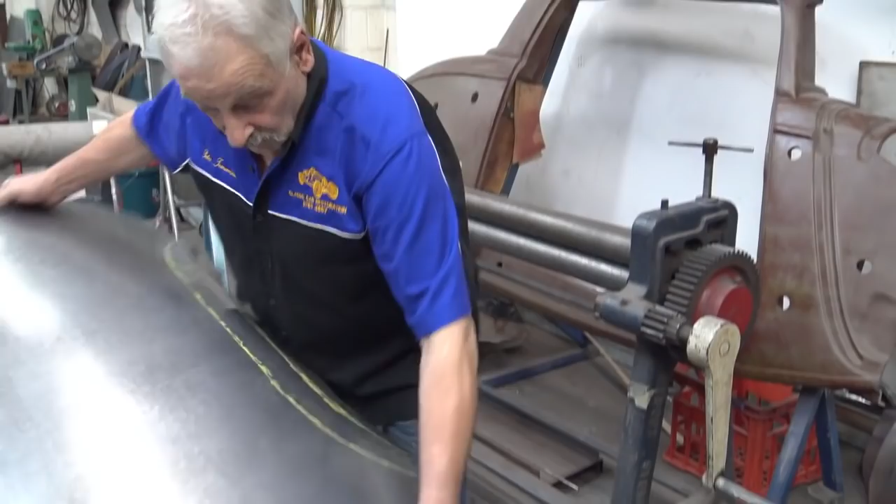All right. Front of a Jag bonnet. I'll show you the mess of the bonnet that I'm working on. Just follow me. Now, that one there. Here we go. This is the bonnet in question. I get the cameraman to go close and have a look at the mess. It's a real mess. It's just too high, too thin.

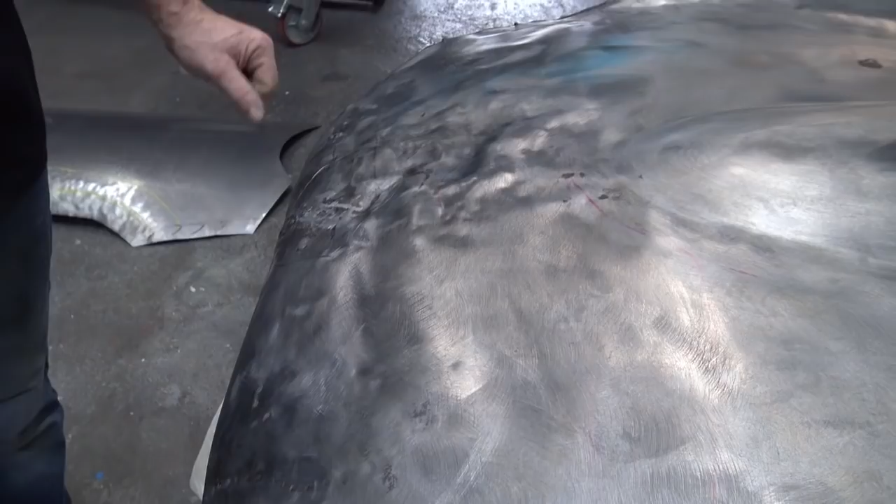They sand the metal out, it's full of holes. It's got damage here, damage right through here. And as you can see, it's fairly high through here from being punched in. But we'll fix all that and then we put the new front.

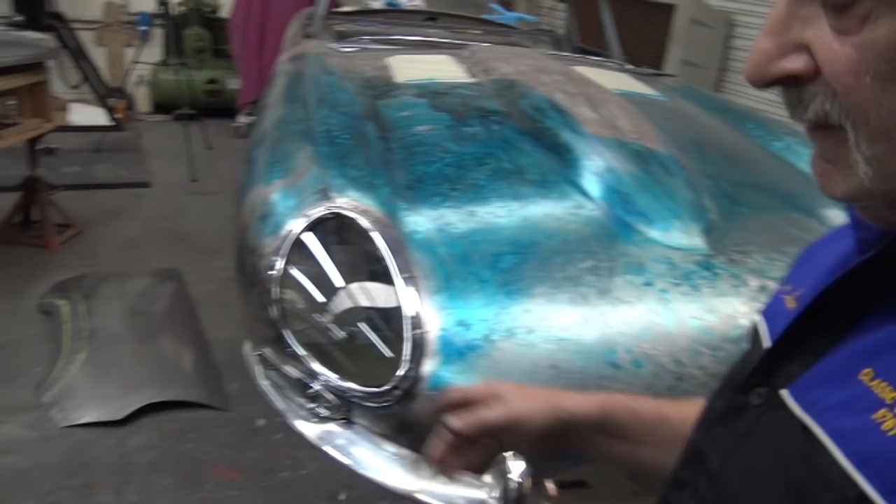Now, the reason why I'm showing this is because I haven't got any bonnets to take patterns off, but I thought I'd use this bonnet, which is the one off the Jag that we're finishing off now. So this is the bonnet that we're taking the patterns off, and that's the reason why I started today, because next week this will be gone. So what you can see there is just the start, the very start.

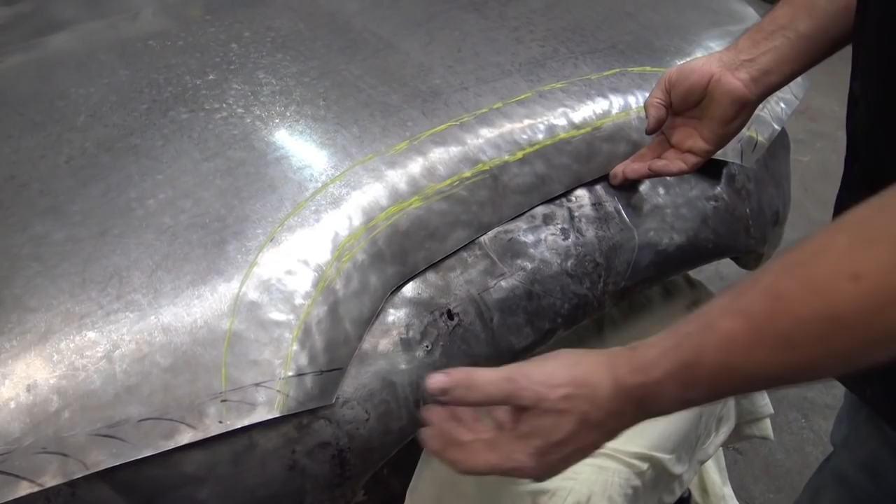And I'll explain to you what I did here. I've marked the edge that goes under, and it's a little bit like the Ferrari panel really. And I marked where most of the shape is for the mouth and blend it in. But as I said before, it's a long way to go yet. But you can see that with a little bit of persuasion, I'm gonna get there somehow.

So that's what I've been working on today, and that's the reason why I'll probably keep the Healey guard a little bit shorter than usual. Okay, back on the guard now, and today I'm going to explain a few things on this panel. I'm gonna take the back half off, and then we're going to work on this. So let's start doing something.

I'll put this away. Let me explain a couple of very important things when you're doing a return like this, because you can get into trouble. The first thing you must do when you've got the pattern is decide a width here. See this line here? This coincides with the guard underneath, and I'll just lift it and show you. That line there is this edge here. So we need to have that somewhere near it, okay? Within a couple of mils, but as you can see, I've got plenty of metal.

Well, that will stop the panel doing either this or that, which then, in turn, will affect this. So you can see that if I move it out of where it should be, it tells you that there's something wrong, but it's not. It's just the way that you put it on the car.

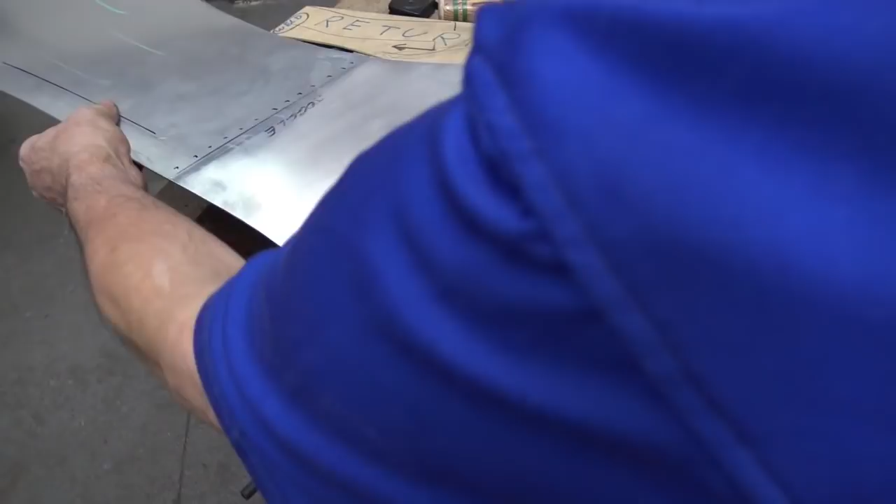So a couple of traps. The first one, make sure you've got enough metal and you can put it in the same spot by literally putting your fingers like that. Second one, make the return and get it somewhere near it. In other words, don't have the return there or have the return there, because as you can see, it doesn't work. So have it somewhere near it. It can always be adjusted because of the length of the guard that you're making.

And thirdly, make sure that this area here, this bulbous shape, is deep enough so that it allows the return down. I hope I'm clear on that. But as you can see, I get the cameraman to come down and have a look. I've got it where it should be as far as the length goes. Keep in mind that the weld is back here. I'm sorry, yeah, back here. And I've got two little lines there, right there.

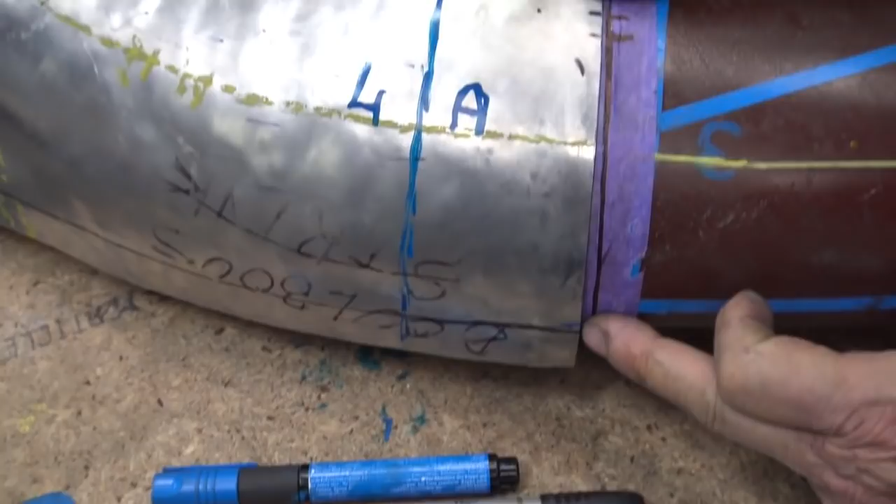Now, at this point, if I put a clamp on that, see there's another line there, and there's another one down here. So at this point, you should be somewhere close to the return here, and by the same token, somewhere right there.

That's how you work on it. So now, I need to do a little bit more blocking in here, just a little bit, because I can see that that's not round enough, and that possibly will stop me from coming down. So what I'm going to do, I'm going to smooth that off a little bit on the block with the blocking hammer right there. Then I'm going to literally open it and start wheeling it.

But as you can see here, there's not that much to do. You can't twist it, you can't do anything real bad, because the guard, as the last guard, sits there pretty good. So obviously, yes, there's a bit of adjustment to do, but we're 95% there. Okay, so now I'm going to show you what I do here, and then I'm going to open it and I'm going to smooth it off.

So now we're going to smooth this part up right there, but the best bet is to open it a little bit, because otherwise it will just keep closing, and that's not what you want. So what I'm going to do, I'm going to open it a touch, just exactly like I did the other one. See, I'm going to open it, and of course when I block it there again, it's going to close. So here we go.

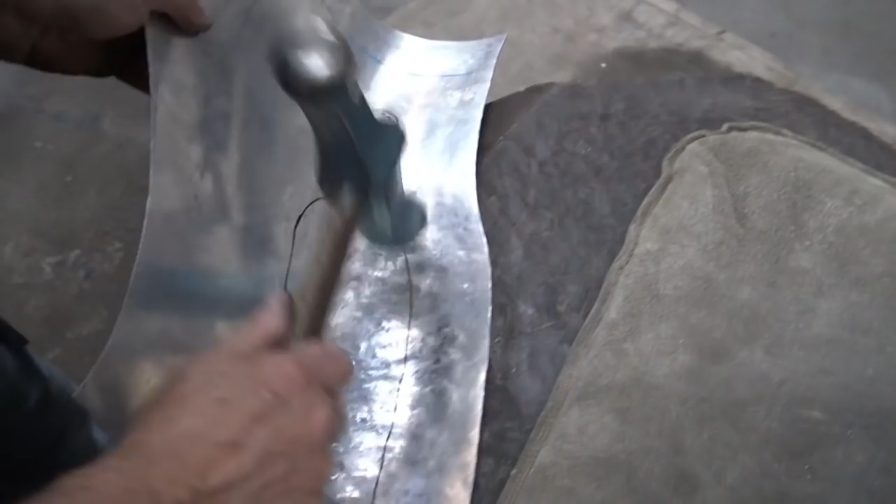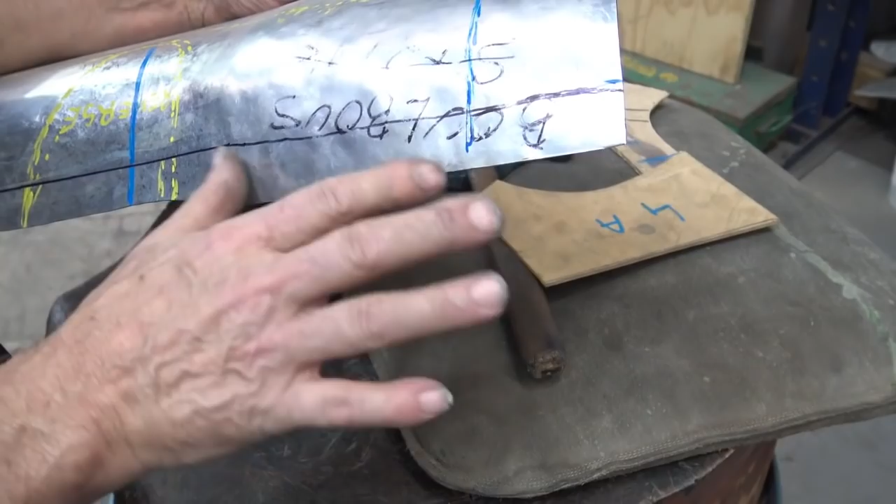Okay, now I'm going to put my gauge on and have a look at it. Okay, I've got my gauge here, 4A, and the same thing applies as like the rear of the guard. I've got a given line here, which I forgot to mention, by the way. I put a line there. It will go deeper, which means that the line possibly comes to here. But for the time being, all we want to do is to see where we're going before we're wheeling. So I'm going to put that there.

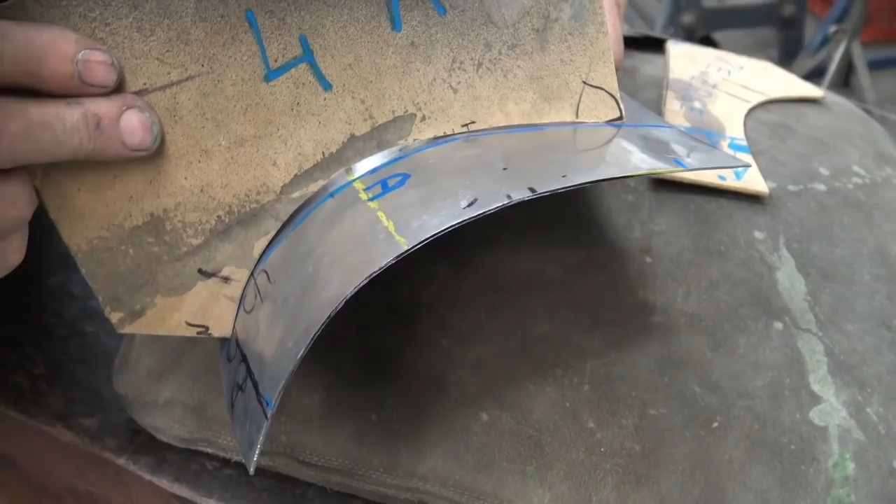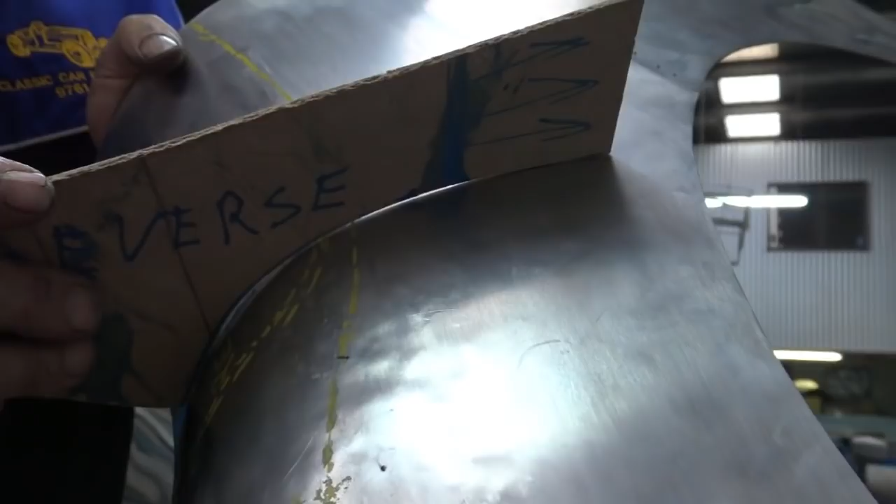Okay, going by this, as you can see, it needs more blocking here. I'll show you it again. Right there. Okay. Now we also want to check the reverse, because I have been doing some planishing just there and stretching the edge. And I just want to see where I'm at. I haven't checked it, so I'll check it. Well, it is close, real close. I think by the time we wheel that, it'll be okay.

Now, this has been done with the blocking hammer. As you can see, it's all been blocked, all through here. But it can be done with a wheel. And I've got a sample here that I'd like to show you. It's not a whole lot, obviously, but I use that sample to show you another trap. Okay, this is the sample that has not been blocked. It's only been wheeled. No block marks there. So I use this to show you, as I said, another trap that you must be aware of.

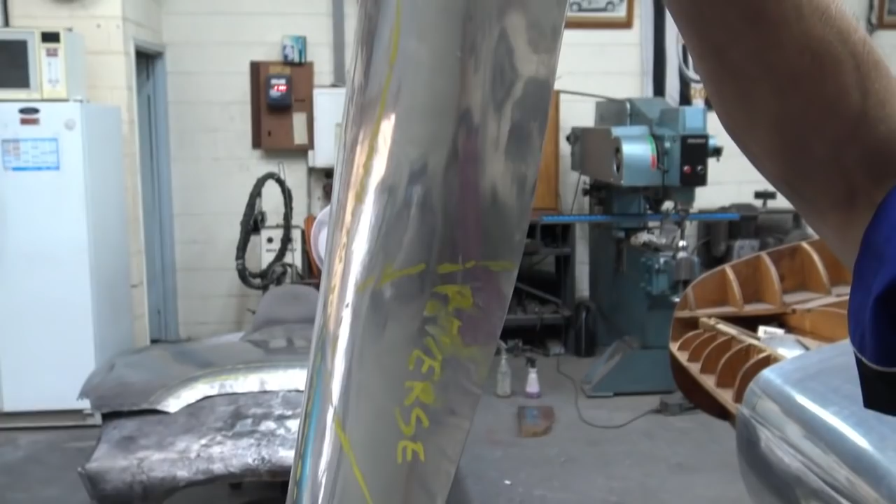If I put the reverse like that, you can clearly see that up here, it's not straight. Can you see that? But as I'm turning it, it diminishes somewhat. You can see it diminishing. I get the cameraman to follow that shape, and up here, we're almost straight. And then of course, down here, we are dead straight. So now I'm going to use this to show you exactly what I mean.

What I wanted to show you is on this mudguard here. You see here, it's straight. See that? Here, after the reverse, it becomes straight. So that's a good indication. You can use that on your guard as well. But as I mentioned, this was only wheeled up, no blocking.

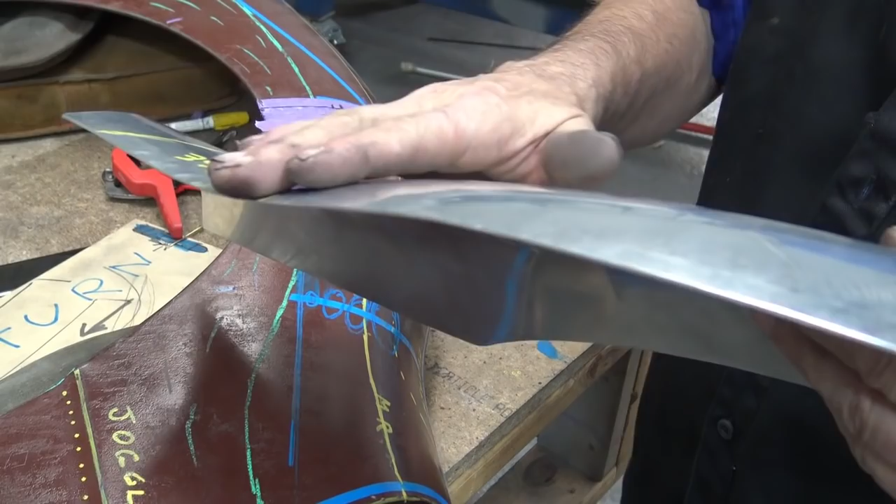So it's up to the individual if you want to block it first and then wheel it, or you can wheel it. Having said that, I honestly think that blocking it is a lot quicker. You block the shape like I did on the guard down there, and you just wheel it up, because once it's shaped up and it's blocked, all you've got to do is just very lightly wheel it and job's done. If you're trying to do too much with the wheel, you might pull too much here, you might not pull enough there, and you're fighting the reverse all the time.

So yes, it can be done with the wheel, but I think it's a lot quicker and a lot more manageable if you shape it up with the blocking hammer first. Okay, we're back on the guard now, and as you can see here, again, whether it's here or there, that needs some shape there. So I'm going to put that shape now.

Let's have a look. There we go. That's good enough. Now I'll check the reverse again, and if that's okay, we're going to open it up and wheel it. Yeah, I reckon I can do something with that.

I'm going to go on the ground now, mark the radius like we did on the last one, open it up and wheel it. So, I think that the radius, well, that's the middle, but the radius itself, it's about there. We know that that's the middle somewhere, and we know that that's roughly where we need to wheel. Then we got, of course, our reverse, but that's totally different. So I'm going to open it up now and wheel it.

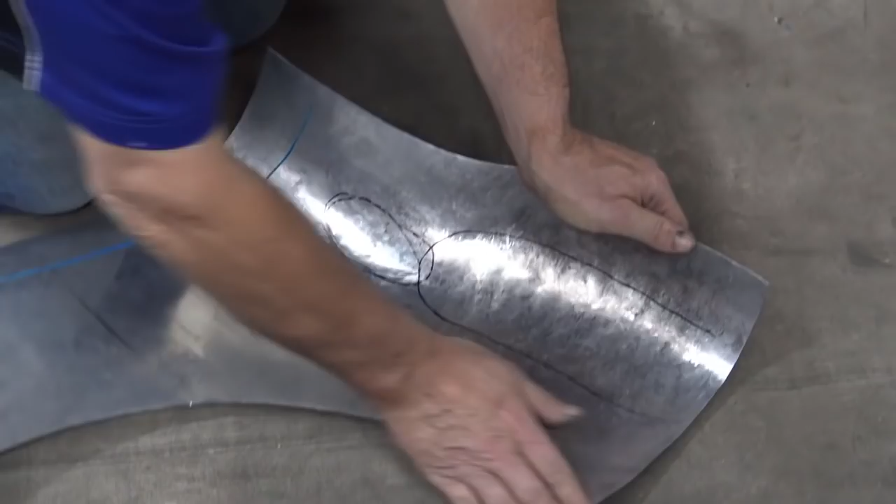Okay, I will open it up. Just very slowly. We need to put, as I mentioned before, the straightest wheel possible there. Be careful you don't kick the reverse. You just want enough room to be able to do your bulbous. So there you can see now it's fairly open. I'm going to literally just wheel it and smooth it off.

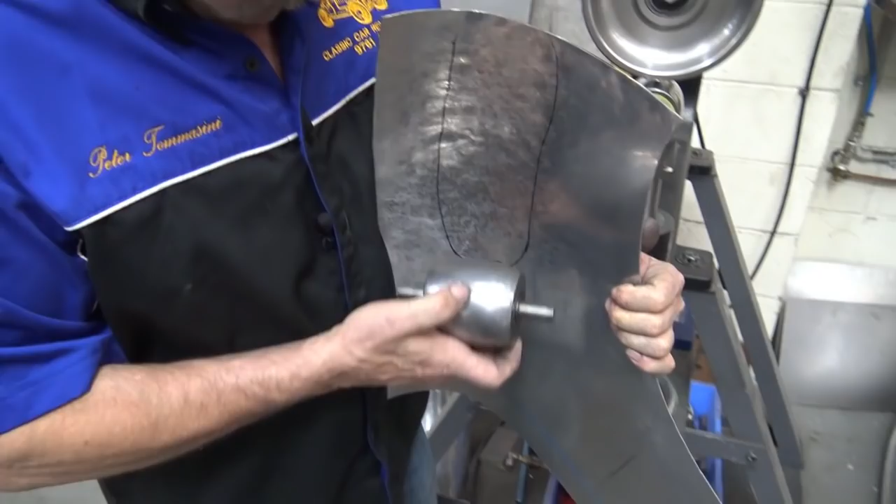As I always do, I will check the best wheel adaptable for that shape. If it's too flat, as I mentioned before, you end up flattening it all out, possibly go into the return and put marks on it. So I think that this wheel here will do just nicely, and if it does open it up a little bit, I can always close it. So this is the wheel I'm going to use. I'll change the wheel.

I put my panel in there, I'll give it a bit of a clean. Make sure there's no foreign dirt. And here we go. Same thing with the last one, no pressure. Especially on this one. Especially on this fella.

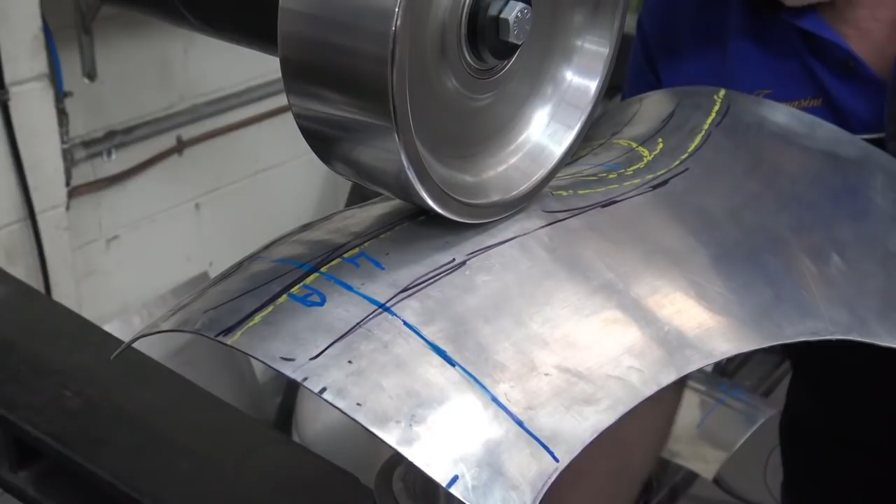So, now we've got to find a way to be able to wheel the bulbous with little pressure, because as we come into the reverse, if we got too much pressure, we're going to stretch the reverse and possibly stretch it too much. I just got a little bit of pressure there, and I'm going to literally wheel that.

Now, as you can see, because it's been blocked, have a look. Because it's been blocked, there's no pressure there, because I stressed the point. If you put too much pressure there and you happen to go into the reverse too quickly, you're going to either stretch or mark the reverse. So you want to concentrate on that a little bit first.

Get it somewhere close. I will increase the pressure here a little bit. There we go. Come into here. Lift up a little bit. I can feel a lump there. Put the metal there where I want it. Stretch the edge. Exactly the same that we did the other panel. No difference. Bit more pressure. Right there.

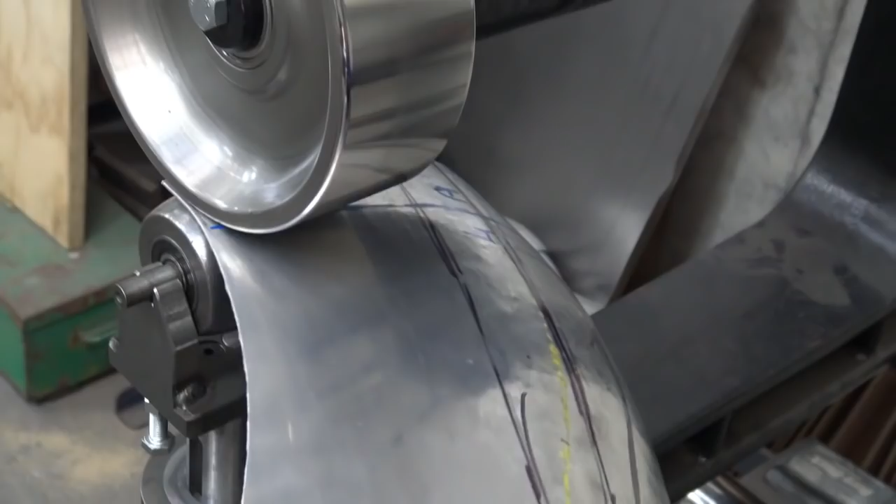One thing that you must notice, and I get the camera to come around, I am not going to the reverse. I'll point it out in a minute when the camera is set. Okay, as you can see, I'm stopping here. But again, I stress the point, because I got no pressure, I won't put any lumps. If you got pressure on that, you'll destroy it. Okay, have a look. I'm coming in this way. I can still smooth it off.

Out of the edges. I'm going to be sideways now because I'm about to enter the return. Okay, now that we got that done, we're going to put some shape on. Okay, you can see how it changes, but I can close that.

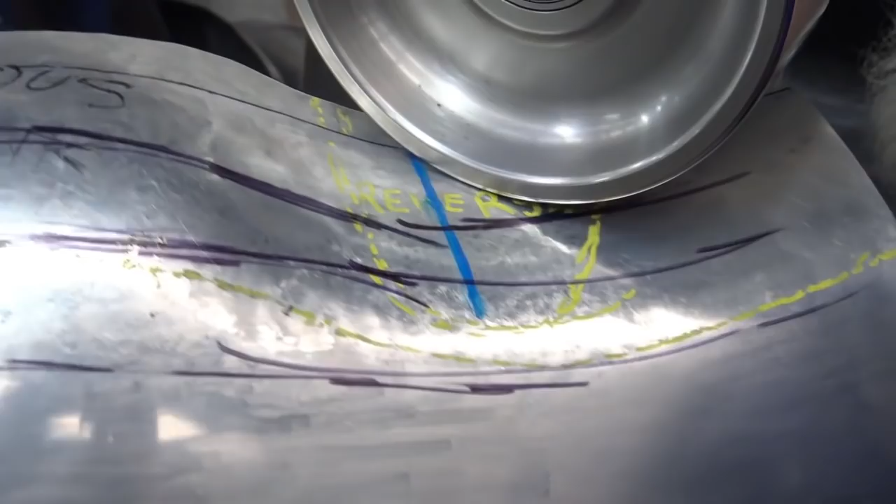Now time to put the reverse. But this wheel, unfortunately, I need to try, because I might be able to do it sideways, but I doubt it. So I need to take the pressure right off, and let me check. Yeah, I can do it with this wheel. So now, it's a matter of just going in there and follow what you got. Look, I'm not pulling, I'm not pushing, I'm not doing nothing. I'm just following what I create with the blocking hammer.

Like that. Be very careful of the angle. You need to get under there and have a look, as I'm doing now, because the angle changes and you can really hit that reverse in the wrong way and damage it. But you notice that I'm not yanking it, I'm not wheeling in one spot, I'm not changing the pressure, I am not doing anything that I'm not supposed to be doing. So I'm going to do a little bit more and then check it. Now I'm going to change hands and come from this end.

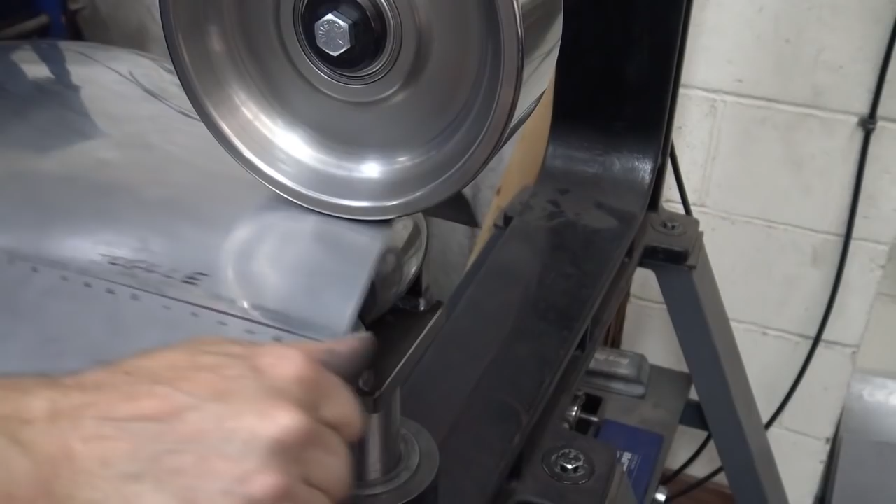I just want you to watch my action and where my eyes are. Because if you turn it the wrong way, you're going to put a nasty... Now of course here we are straight. Remember I mentioned that before, so it's safe and there's no pressure. Okay, I'm just going to do a little bit more here and then I'm going to close it and check where I'm at.

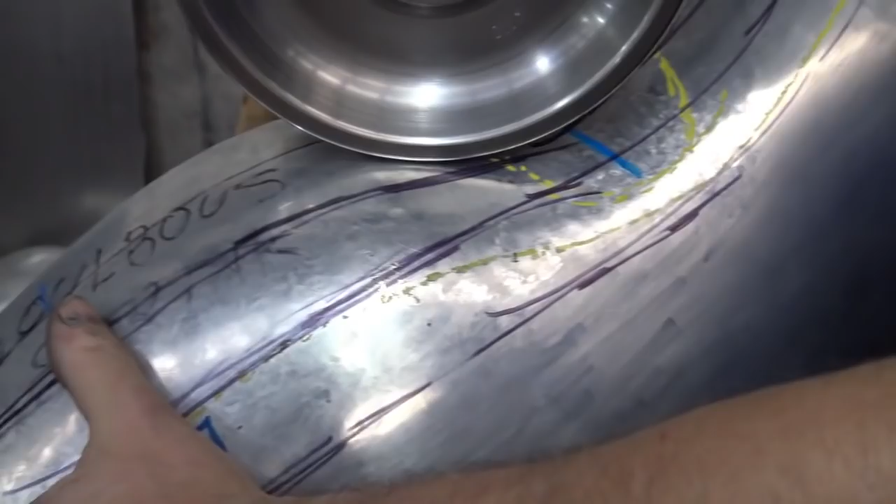Have a look where my head is, guys. Down there. I want to see the angle that I'm using this at. You'll see when you make that one wrong move, you enter the return the wrong way, and you're just gonna undo all your beautiful work. Now what I want to also do, you'll see me in a minute taking all this out and start again. Okay, let's close it and have a look where we're at.

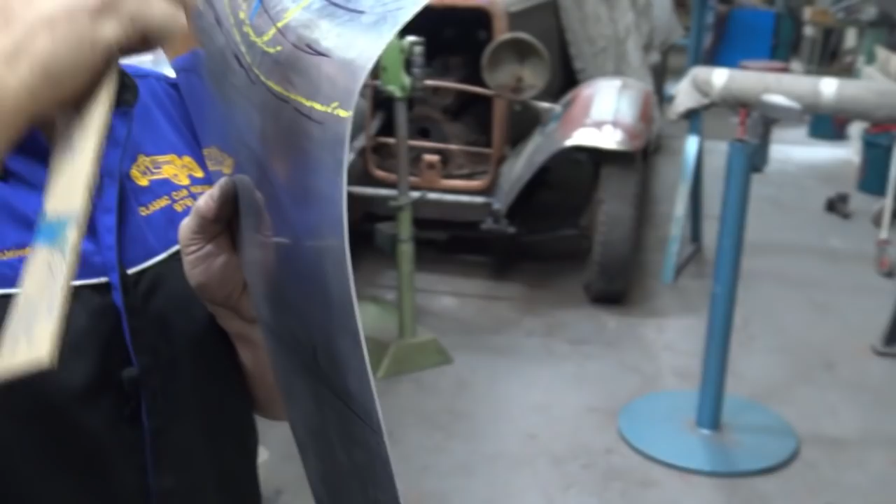All right, reverse first. I've got to go down there. But before I take it down, I need to see how we go down here. If I take this down too prematurely, it will probably put a lump here. So after I check that, if that's flat, I need to stretch it there to bring it down. If it's hollow, I will bring it down and pop it out.

Okay, at that point, that needs to be flat, and it is flat. That's hollow, that's hollow. So it might need a little bit of both. It might need a bit of stretching and a little bit of bending. Okay. I tried to bend it first. I tried to stretch it first. So I put a little bit of pressure there.

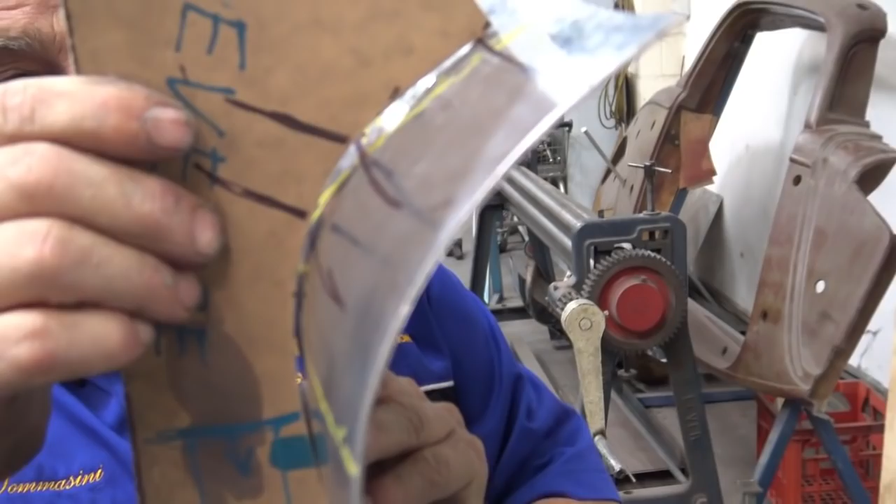And by stretching the edge and pulling up, but again, look, there's no pressure, look. See that? So I stretch it and pull up a bit. That'll drop it. Okay, let's have a look if we dropped it. It's going. See, it's going? It's dropping. Now I check this again. Dead flat. That's what I want.

Okay, that means I must keep going the way that I've just been doing. On the edge, stretch the edge, come in a little bit, go into the bulbous like so, change the angle, and stretch it a little bit more. I'll check it again.

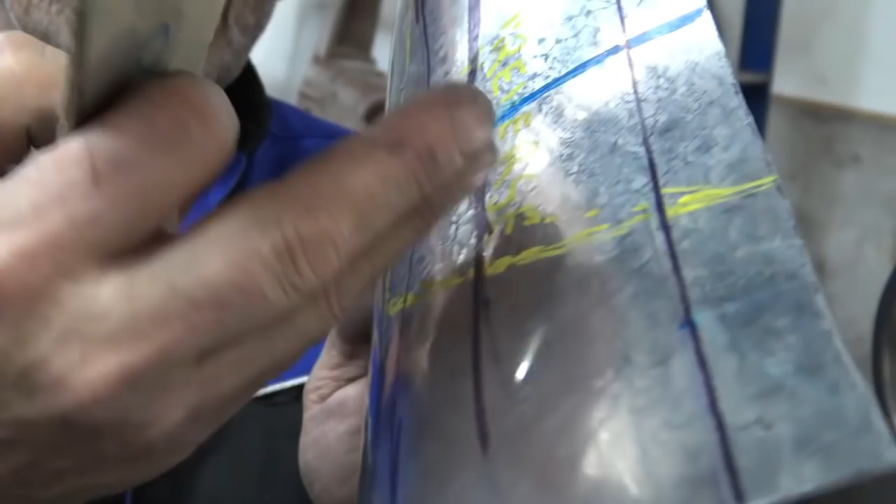Okay, it's not going very well, but what I'm going to do, I'm going to bump it up in here. Obviously the wheel is too big for that, so it's very easy done. See where it's hollow there? And high there? Well, if I bump it up here, that'll come up and that'll drop. So we're going to do that right now. We know that this is high, and we know that we got a hollow there. So all I need to do is this.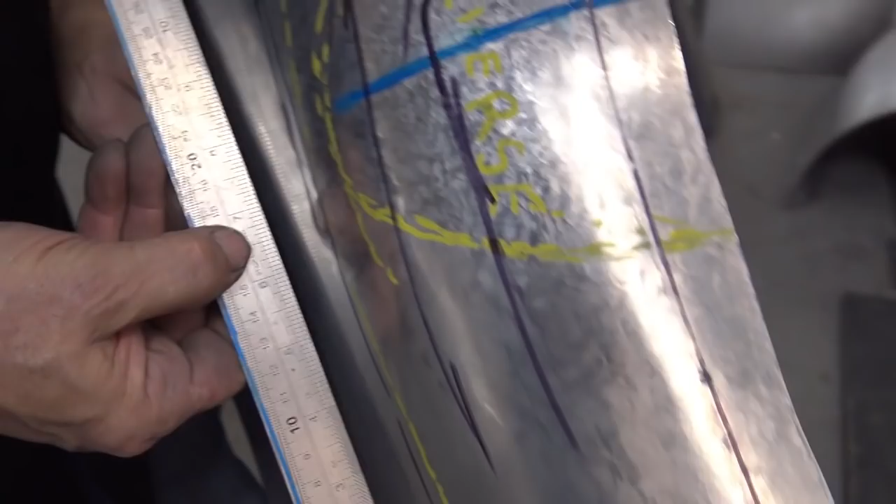Now we check it again. A little bit more. But by the same token, I'm always going to check that. Make sure that that doesn't bulge out. Because again, if I try to pull that down without stretching it, it's just going to bulge out. So I think I'm going to do a little bit of the same thing. Right there.

And I'm going to check it. You can see that without any gauges, well, here we go. Okay, now we are safe for the simple fact that I've gone too far, but I can lift it. And as you can see here, it likes to put a leg out of bed, if you want to call it. It's too far out here. So I need to lift it a little bit. There we go. And I need to stretch it.

I put a bit more pressure, just a touch, just to stretch that edge down. The reason why I'm stretching it is I want that to lay back. I've got the profile, I just want it to lay back, so I'm stretching that. I'll take the pressure off now, and I'm gonna come in here where I just bang it. But I need to look where I'm at, so I'll change position. There we go.

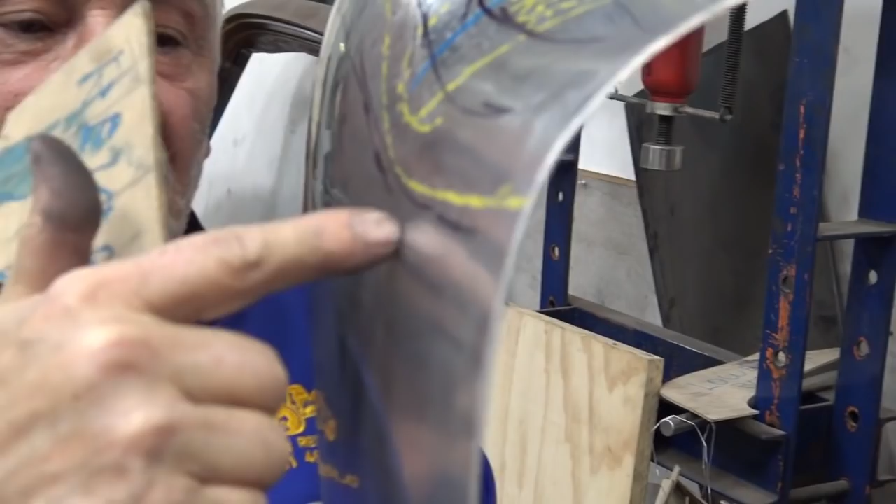Just a bit more wheeling there. All the way. No pressure, gentlemen, no pressure. See that? And of course, check it again. Okay, I need to bend it by hand there. This will go in and that'll pop out. So I'm going to do that right now.

Okay, let's have a look. Too much. See that? Start to rock now. All that means is the dish is popped out because I bent it, so I need to stretch it some more. See that? Right there. It's popping out too far.

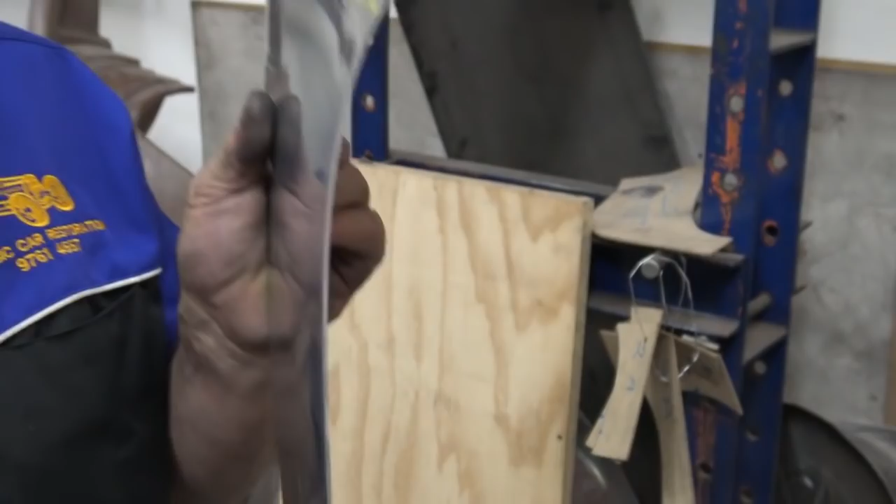So what I might do, I use my wheel and drag some of that material out to the edges and then stretch it again. So in other words, the material here that's making my pattern rock, and I'll check it again. Yep, I'm going to drag it out a little bit. So right angle, must have the right angle, and just literally pull up a bit.

But I've got no pressure. So I'm dragging that material out to the edge and then I'll stretch it. See, I'm dragging that material out of the edges, and once I'm into the edge, I tighten up the wheel and stretch the edge.

Take the pressure off, go back in there, at the right angle again, lift up against the top wheel, and walk it slowly, slowly, slowly, to about there. Tighten up the wheel and let it out. Let's have a look what we got now.

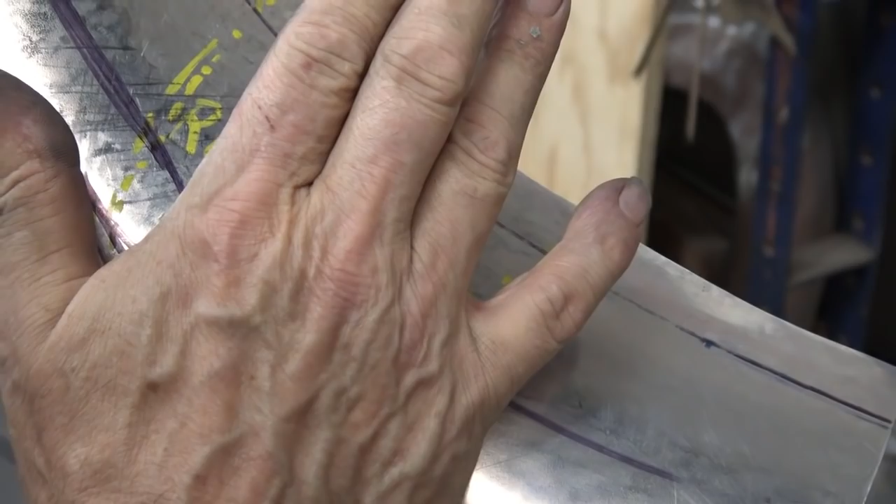Okay, as you can see, we came in, but the material that I got rid of there, it's up here. You see that? Look. So there's okay now, I just need to drop that. So, the material that I've dragged out of here, gone into there. That's why this is up already. So what I need to do is to drop that a little bit by wheeling, and we should be okay.

So I'm going to tighten up the wheel and stretch the edge. In other words, let it out. Take the pressure off and come back in this manner into the bulbous, of course. Once you're in the bulbous, you're safe. You need to have patience on this.

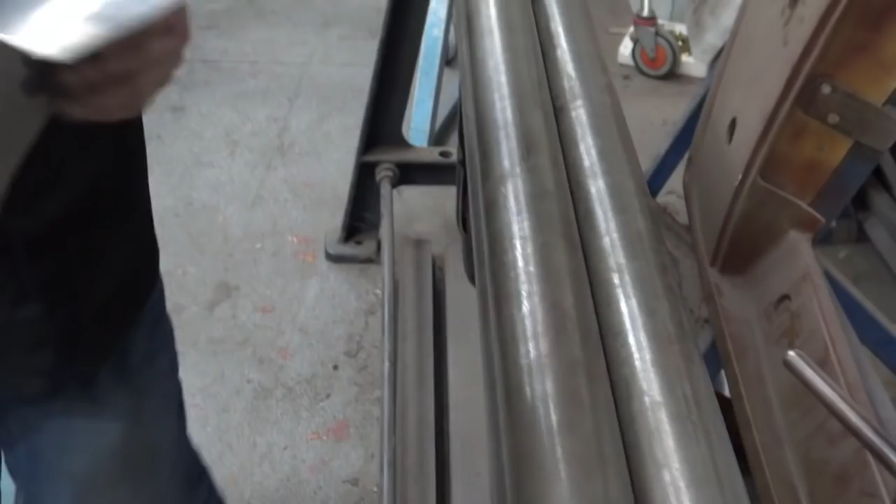Okay, let's check it. I'm going to bend it and see what we got. Here we go. Here we go. A touch more there perhaps. Bingo.

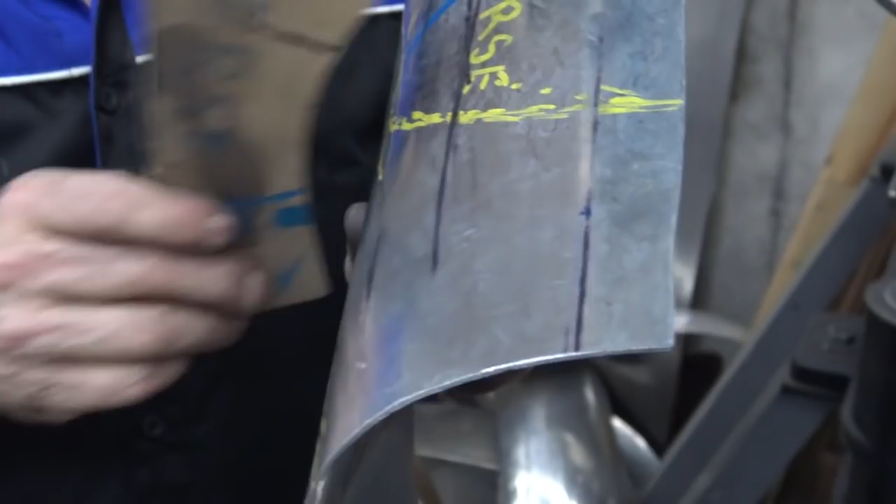Okay. Now I want to show you, I'm going to take all these marks out, I can put them back later, but I'm going to show you from here how to fix it smooth. First of all, we look at the inside, and you can see that it's shiny, but there's a couple of marks there. They're all done with a blocking hammer, but it's no big deal.

So what we're going to do now, I'm going to clean all this up, both sides, make it dull again with a bit of Scotch-Brite, and then shine up my wheel and follow my track. And by the time I follow all my tracks, I should be pretty good. As mentioned, at this point, I'll show you by turning it that it's not that bad as far as finish is concerned, but it still needs a lot of work.

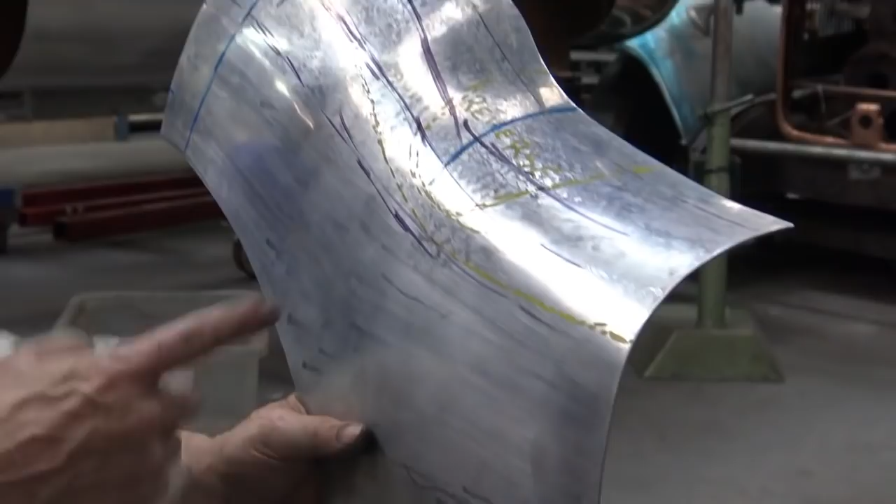But now we got marks, dirt, fingerprints, lines. It's a little bit hard to determine where it needs to be wheeled. So what I'm doing, I just literally put some thinners in there. Get my fine Scotch-Brite. Okay, now I'm on the inside. Clean it all up. Fine Scotch-Brite, you don't want a coarse one. Okay, I Scotch-Brited, you can see that it's dull.

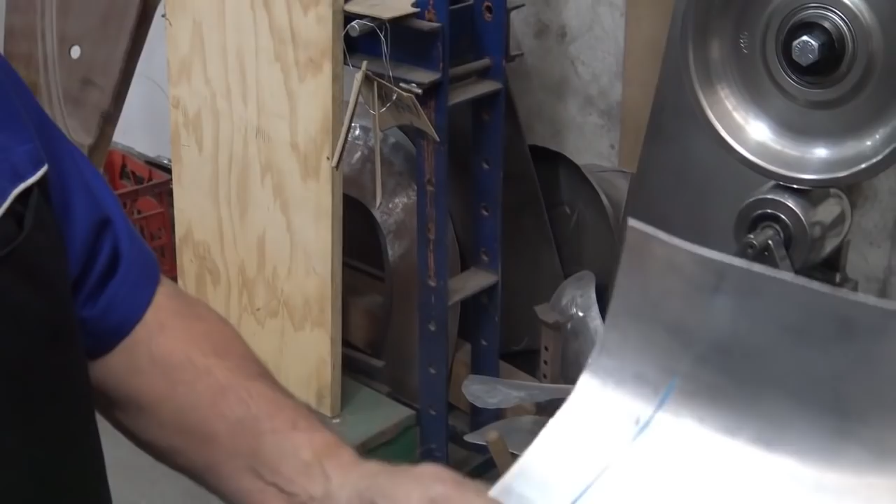You can see a few things there, and a couple there. But now with a clean wheel, there's the inside. With a clean wheel, you'll be able to follow your track one on top of another, and believe me, it'll smooth off perfectly. So, let's clean the wheel and let's get into it. My wheel is clean, and now I see if the cameraman can pick up the tracks. So I get him to go real close to the wheel, and you'll see the tracks on the dull aluminium.

I'm just going to show it to you in a minute if you can't see it on the wheel. Yes, I'll finish this run and then I'll show you.

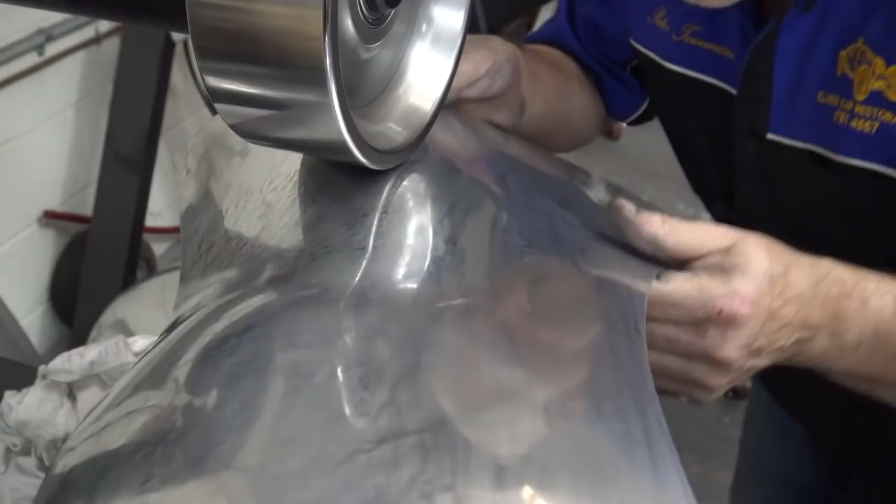Okay, now I'm going to stop and check a few things. The track and the shine off the wheel, and the feel of course, will determine how smooth this panel is going to be. You don't wheel here and there and everywhere. You just can't do that. Tracking is extremely important, no matter what other people have said to you. Track, track, and track. And I'll show you in a minute what I really mean by it.

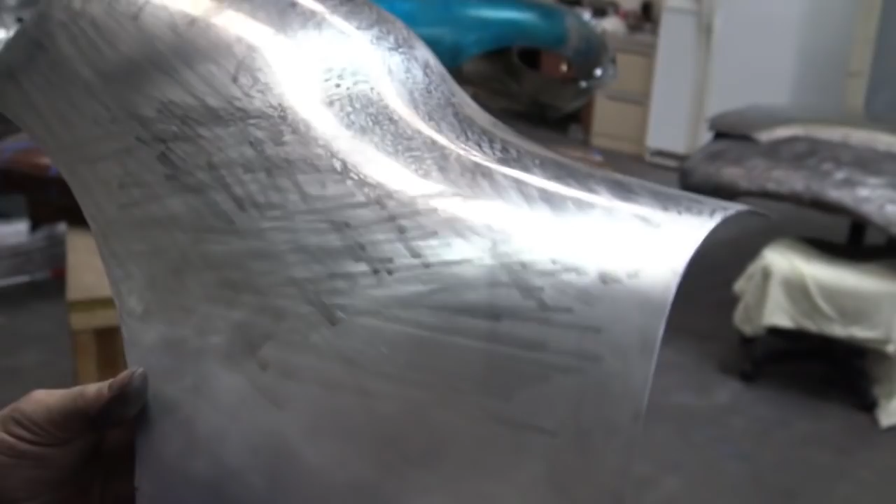Okay, have a look at that, gentlemen. Now I'm going to close it and check it before I do the final finish. Okay, let's see what the pattern tells me to do, how far to bend it, where to bend it, and on and on. So, as I mentioned, I'm wheeling with a fairly wide wheel. Should be a little bit tighter, but then I'm running the risk of putting lines. So this will open, but I know that it's been there before.

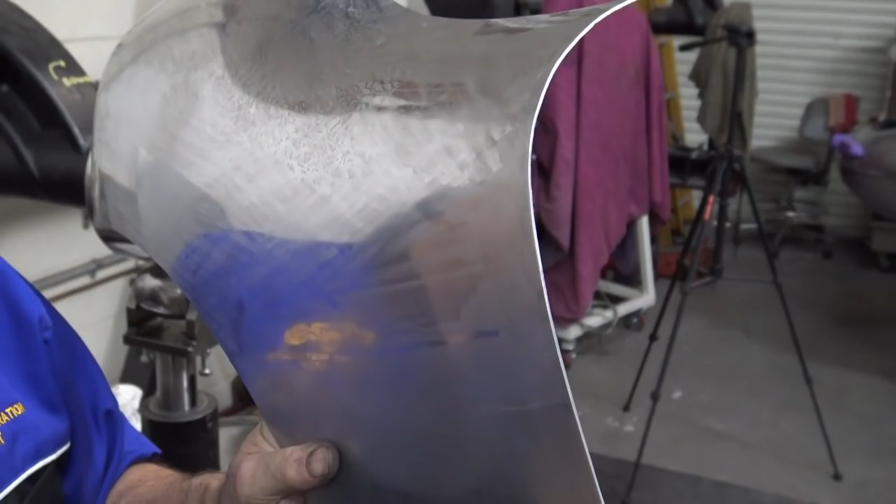So, okay, see that? It's open. So what do I do now? I simply close it. Follow me.

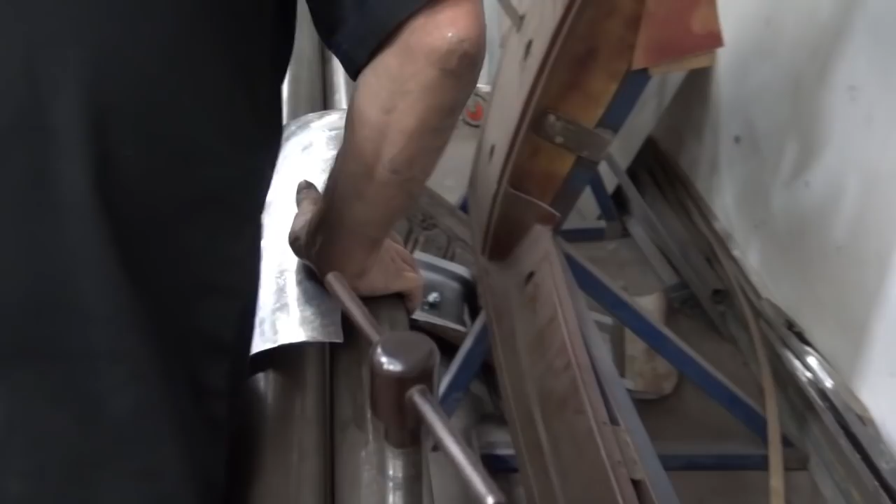Okay, let's have a look. A little bit more there, just there. Okay, now this is good enough for the time being because we still got to put on the buck.

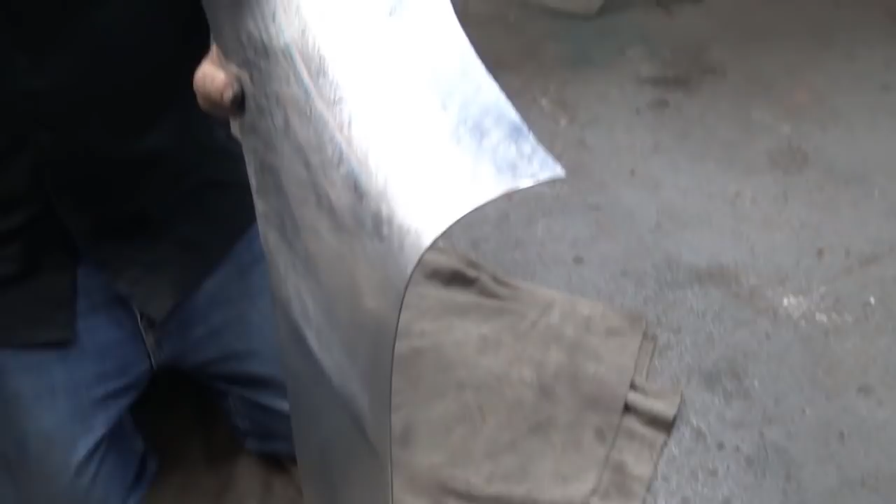Now we need to go on 4A, which is here. And as you can see, that's open. I'm on the line there, I can see the line where it used to be. So I'm going to close it. And a touch more. The line was there, yes. So I need to close it there.

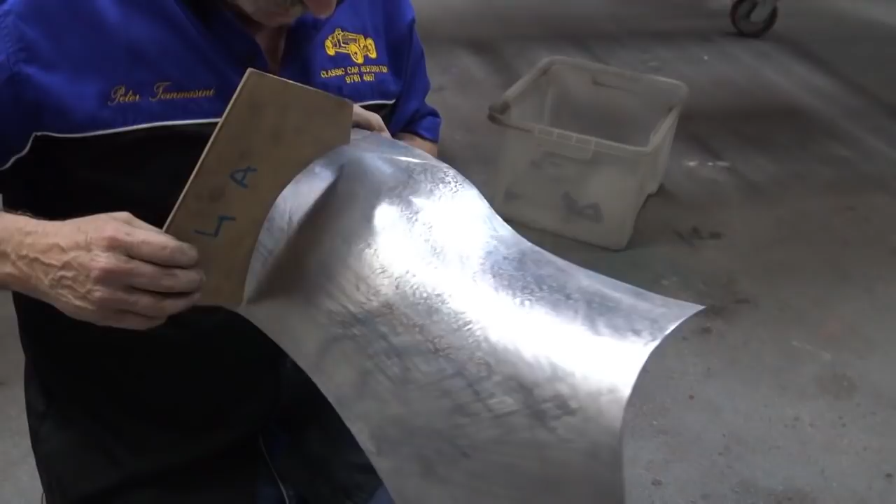I need to put that back on the buck to see if these lines change. So let's go to the guard and have a look. All right, let's have a look if this line has changed. Okay, the first thing we need to do is to make sure, remember I mentioned to you this side, because you don't want that to move, because if it moves in or out, it will change your position. So I'm gonna put a clamp there to stop it from going back or forwards for that matter. So I'm going to put one in there. Just bear with me, I'll tighten it up a little bit.

Okay, that will stop the mudguard going forward that way. Now, the idea of this is to see where our line has got to. So, I'm here. There. And there. So if I connect these, I just check it. A little bit lower. Yeah.

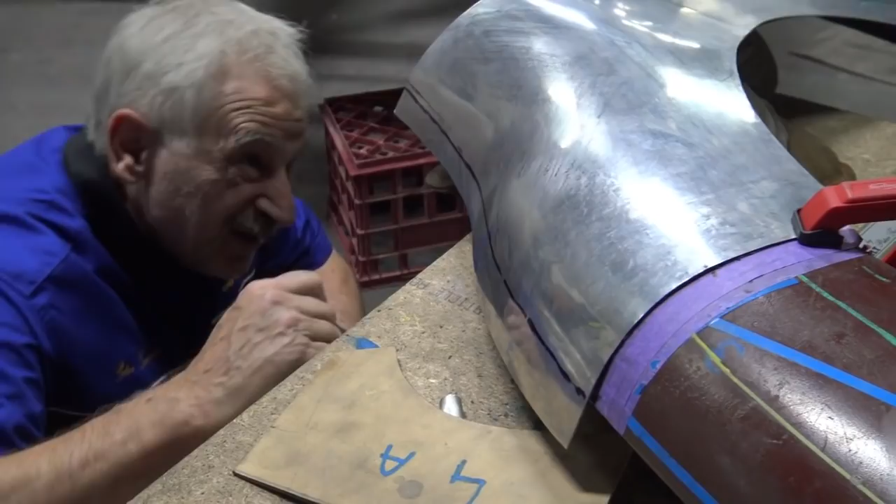Now I need to check. I better put a clamp there actually. Stop it from moving. It's moving on me. Okay. Let's check that again. 4A. Definitely want some shape up the top. You can clearly see it through here, but that's not a big deal. Now I need to check the return, and then most of all, that shape. So I'll just check my return, which is here. And again, yeah, that needs a bit of bending, just a little bit.

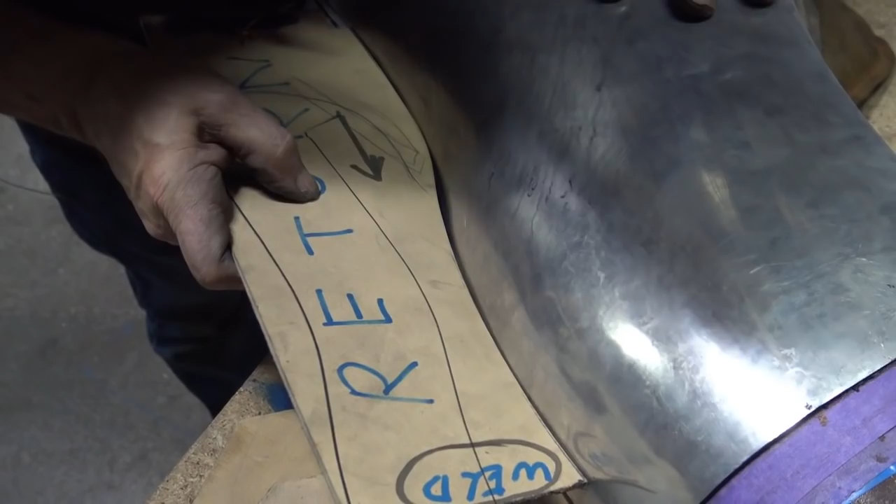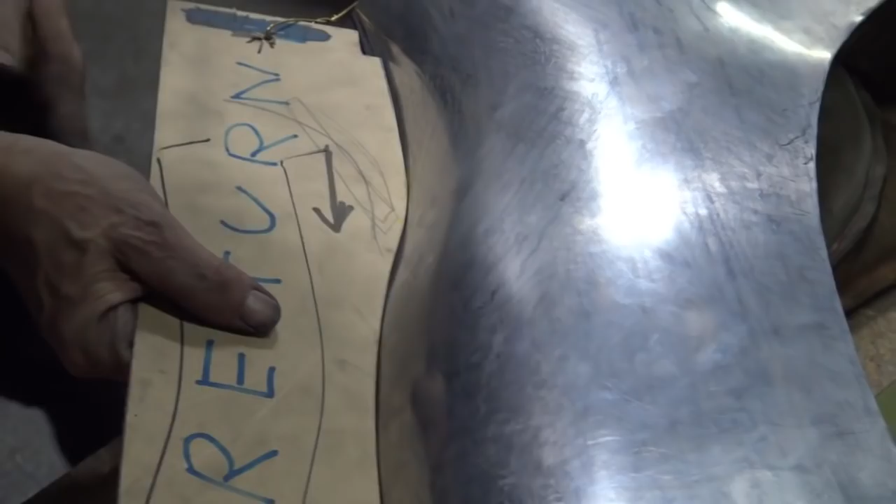And now, last but not least, knowing that that's where it's turning in, I need to check that. And as you can see, it's a little bit too deep. A little bit too deep. So what I'm going to do, to make sure that I put it on the right spot each time, I'm going to mark it, if I can find a pen, which is right here. I'm going to put that in the right place here. Okay, right there. So I can put that gauge back on the same spot each time.

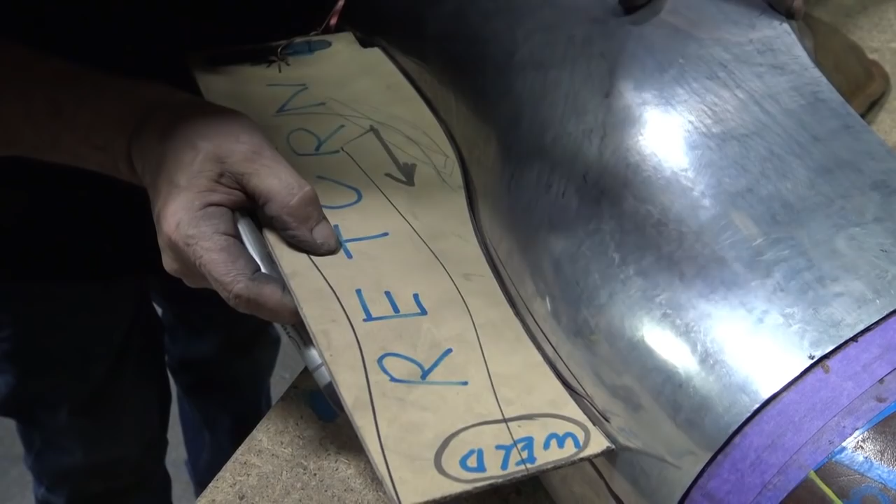And I just change a few things, but not much. It's actually not too bad. Okay, so I'll do a little bit more wheeling to show you how we're going to fix it. This needs a bit of a bend, that will fix the problem. Aha, I can see it right there. And I'm just going to bend it a little bit there. That'll bring this home, see? It's hard up against there big time. See that? So I'm going to bend it there. That's where the problem is, right there.

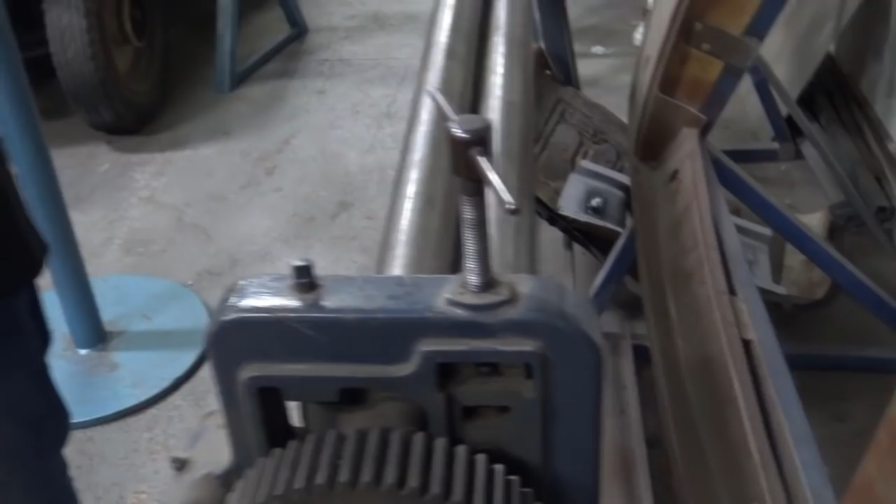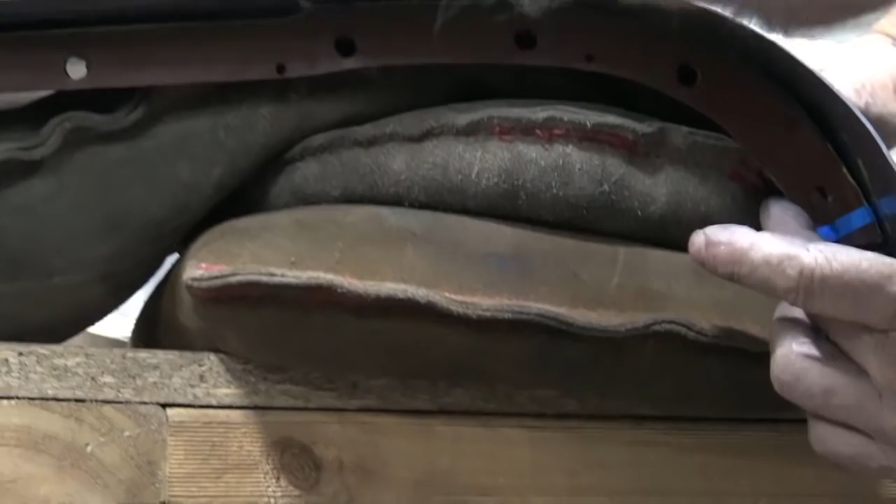I'll check it again. I still got the clip here, so this stops me from going in. Just a little bit. Yes. Yes. And yes. What we're going to do is check all these edges through here. There we go. All through there. You can see that it's closed. Don't forget that I still got to bring that in.

Now I'll get the wheel arch edge through here. That could do with a little bit of that, but that's only a bit of a bend. Keep in mind that this joggle is not done. So once the joggle is done, that'll settle down. And the next one, this one.

Okay, so we're at the point where everything is looking fairly good, but we need to adjust this one, which is down there. Have a look, guys, right there. Can you see where it's rocking? I'll get the camera to look right there, and that's where it's rocking.

So if I bring that down, right there, see the rock? If I bring that down, I think we're almost home. So I'm gonna do a little bit of wheeling through there and get rid of it.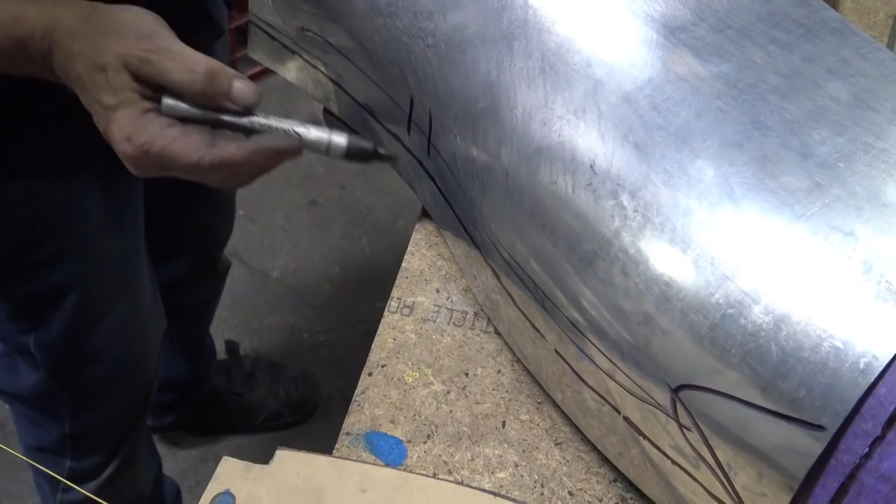Right there seems to be the problem, so I just drag it out. Okay, this is the point that the profile is touching. What that means is that that metal there needs to be dragged out. So I'm going to do that right now. I got a sharper wheel this time because I don't think it's going to matter much for what I'm going to do. It's very light. Rather than use the wider wheel and then close it again and so on and so on.

So what I'm going to do, I'm going to go in there, make sure that I'm at the right angle, okay, and just, I'm going to lift a little bit and drag that out. Here we go, it's almost gone now. I've got no pressure on that, I'm just using the top wheel to drag that out. Okay, let's have a look now.

Here's my panel, here's my line. I'll check it again. It needs to come down a little bit. I'll check it with a return here. Well, as you can see, I've got it down. See that? Look at that, I've got it down. It was rocking there before.

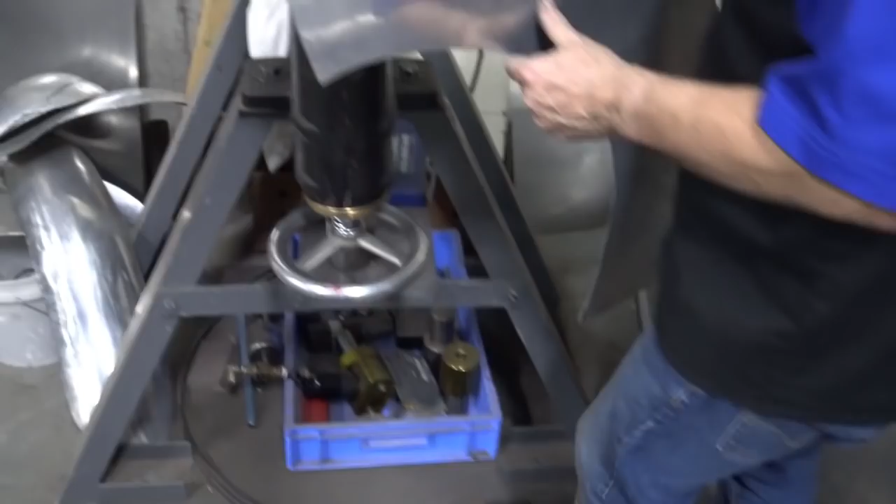Now all I need to do is a little bit of wheeling here and fill that in. Here we go, look at that. That is not rocking anymore, look. I just need a little bit of shape through here and we're done. So, back on the wheel. And I'll do a little bit of wheeling here.

This is the blend. This is probably a little bit hard to do, but we have to do a little bit at a time. Just play with it. Okay, so that's coming down. Need more shape there. You can see where my head is. I need to concentrate.

Okay, let's have a look at it now. Doesn't look bad. Could do a bit more here too. Could do it a little bit more there. So we're gonna do that. That'll also close it. Remember, they need to be closed a little bit. That'll close it because of the way I'm wheeling it.

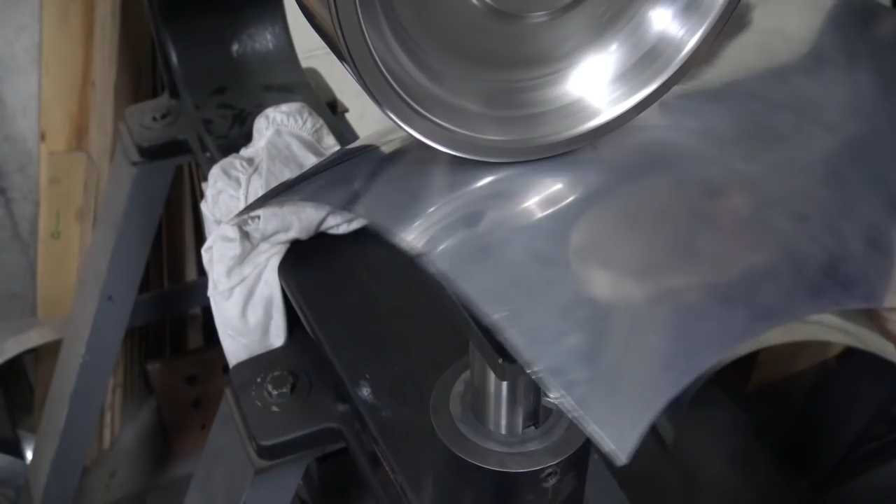But I got no pressure again. I keep stressing this, and this is very important. So I make sure that we get all of this in. This is done with no pressure and no random wheeling. You need to concentrate exactly where you need to wheel it. You could go backwards from here if you don't do it like you see me doing it now, and wondering what the hell happened.

There we go. A little bit more through here. Perhaps I'm going to turn around. Here I can go pretty straight. Turn around here a little bit and keep going. Once you're in the bulbous, you're pretty safe. And just light pressure, close tracks, and as I said before, and I'll say it again, it will come good. The minute you put pressure on this, you'll destroy it. Okay.

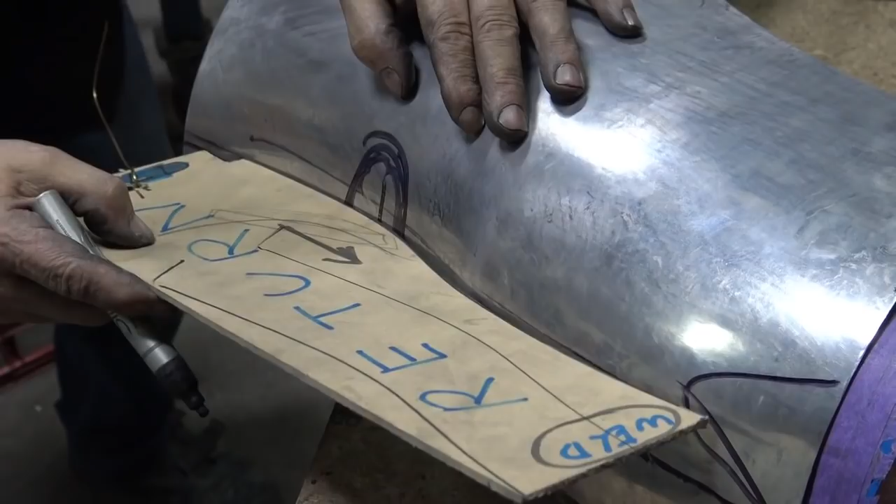Okay, back where we were. Check all of this, that's perfect. No, we're still rocking there. Can you see that? We're still rocking there. This is a funny spot. Let me mark it. It's rocking here. I can see that, clearly see it. So I've got to get rid of that.

I'll do one more. I'll lift up a little bit harder this time. Got to be careful though. I come from this end. Oops. And now I'm blending it in. Okay.

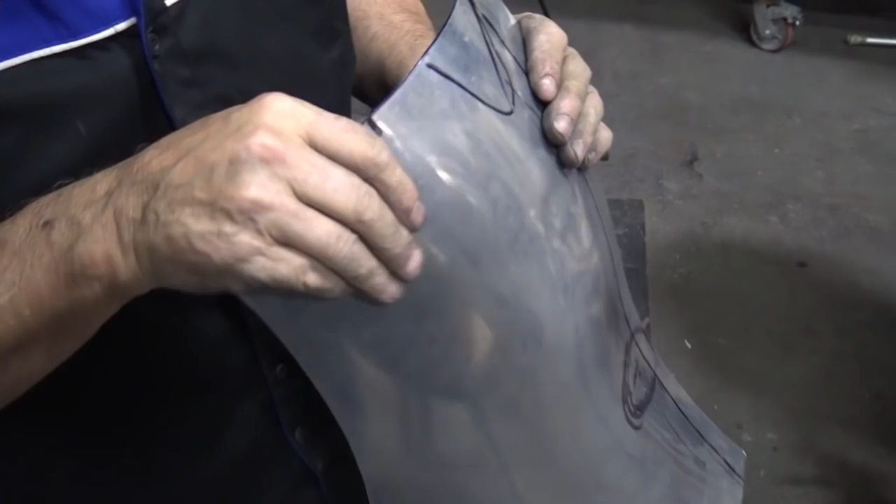I think we've got him. I'll just check this. And then we're going to put it on the wheel and see if we drop that part. Looks beautiful. Yep. I might do one little one here with the other wheel. Or then again, I won't bother about this until I got the joggle out. I need to raise that and drop the joggle. That's why the panel is a little bit high through here. But I think we're okay. Let's check it.

So, first in first. We put that in there, so we're not coming too far out. Okay, so that's there. That's there. Looking good through here. Looking perfect through there. All right, let's check the pattern. Well, there you are. Little bit through there at the end. I'll just check that again.

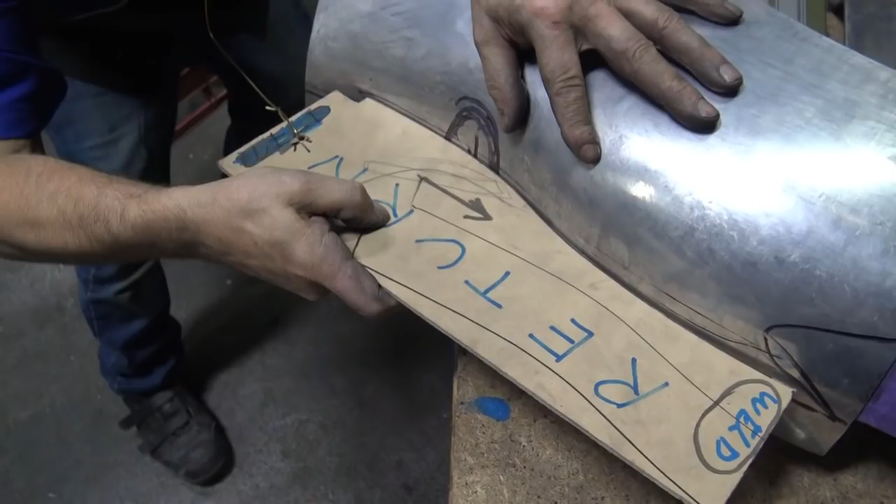Have a look at that, guys. A little bit here, but I can wheel that in. Have a look at it. I get the camera to go right through it. There's nothing in it. So I'm going to clean it up now and leave it at that. In the next segment, we're going to raise the joggle, drop the joggle, so the whole panel is going to drop in.

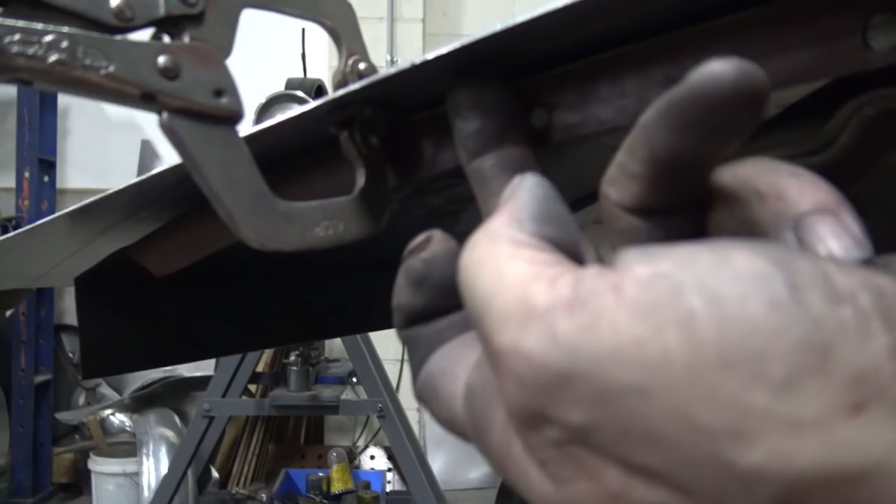Now, if I want to, just to show you, okay, this clamp here, I get the cameraman to go down and have a look that it's not clamping the panel, it's only holding the panel from going forward. See it? Look underneath there. It's not clamping, it's just there stopping it from going forward, yeah? So what I'm going to do, I'm going to put one clamp here. And check it again. There we go.